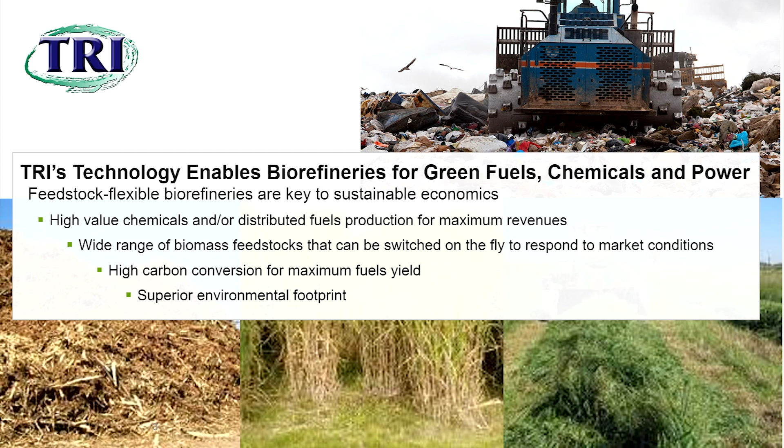MSW is obviously the most complex feedstock you can work with. It's highly heterogeneous, and the chemistry is pretty challenging. And of course, you've got to deal with a lot of contaminants. So at this point, we've got a lot of scars to prove it, but we have gone through a pilot plant and ran about 14,000 hours of different feedstocks. And actually, we went all the way from feedstock to finished product, jet fuel or spec diesel. So I think that has helped us to develop the technology.

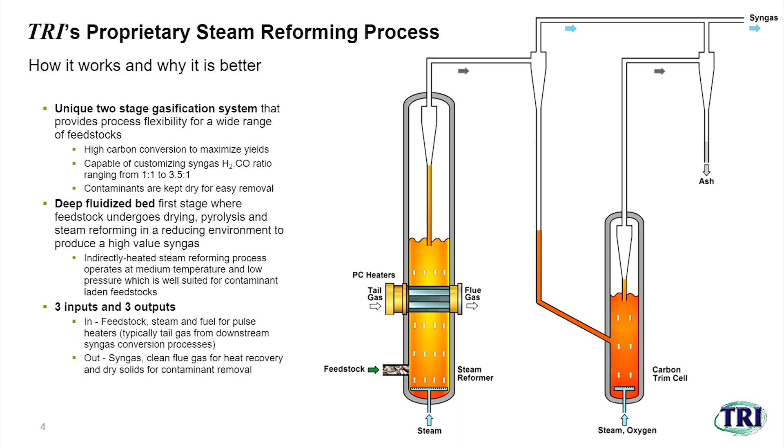And obviously, there are a lot of unit operations, and each part can be modeled separately. What we are doing initially is just this part. So we have a long way to go. We are in probably the second or third inning of this whole CPFD work, but we've got a lot of stuff to do, a lot of options to improve the process.

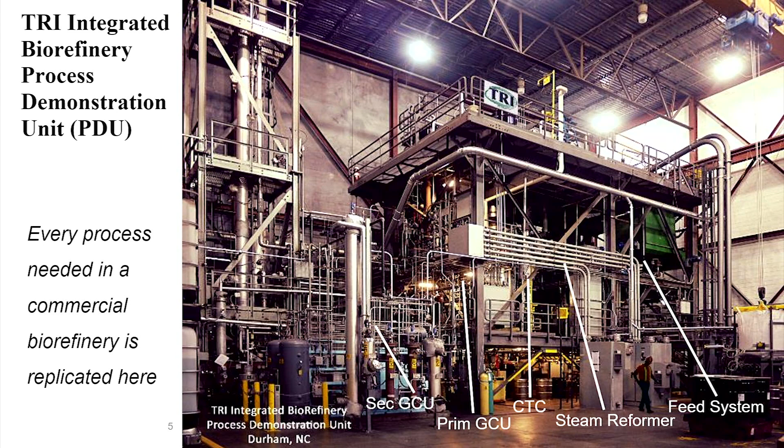And this is our pilot plant, our pride and joy. It's actually a 4-ton-a-day unit. You can see the feed system here, the steam reformer, the CTC, which is the second stage, then the primary gas cleanup unit, then the secondary gas cleanup, which also includes the compressor station, and then the FT unit. This is a standard conventional fixed bed Fischer-Tropsch unit, 3 tubes in there.

So what we do is essentially feed 4 tons a day of feedstock, take a slipstream of the gas, go through the gas cleanup train, compress it, and then run it into the FT, generate FT fuels, and then we go from there to the upgrading unit.

So every part of the commercial operation is represented in here. Originally, we started with just the gasification unit. We said, well, we generate gas, we qualitatively and quantitatively analyze the gas, and if it's clean enough to go into the downstream process, it should be good enough.

But then DOE came back and said, no, we want every part of the process to be represented, because commercially, only when you fully integrate the plant and run it, you get valid data and you can scale up reliably, which made sense, but to find money for that was a challenge. But anyway, finally we went through and got all the parts of the process and demonstrated that.

Now this is the same setup, except that we also have had the opportunity to work with Velocys, and this is the Velocys reactor right here. It's a microchannel reactor. Obviously this is the fixed bed tall unit versus pretty compact, very efficient, and so we worked with Velocys. We have run a biomass for their commercial demonstration unit and generated again FT liquids.

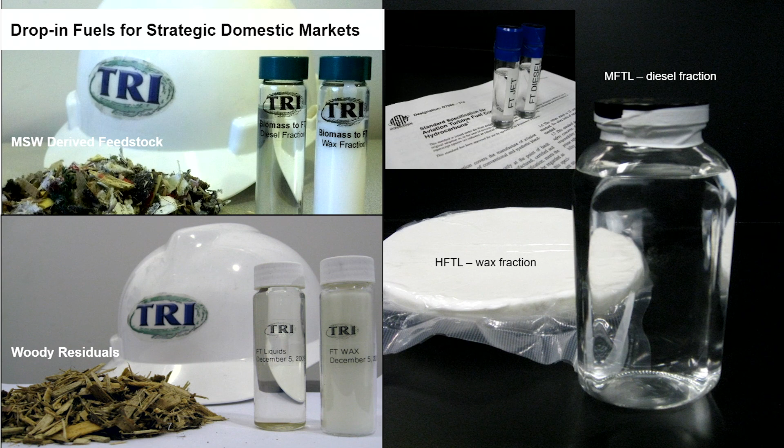And this kind of tells you what we have generated. We have done MSW, we have done woody biomass, some ag waste, and generated FT liquids in here. And then we also have generated jet fuel and spec diesel.

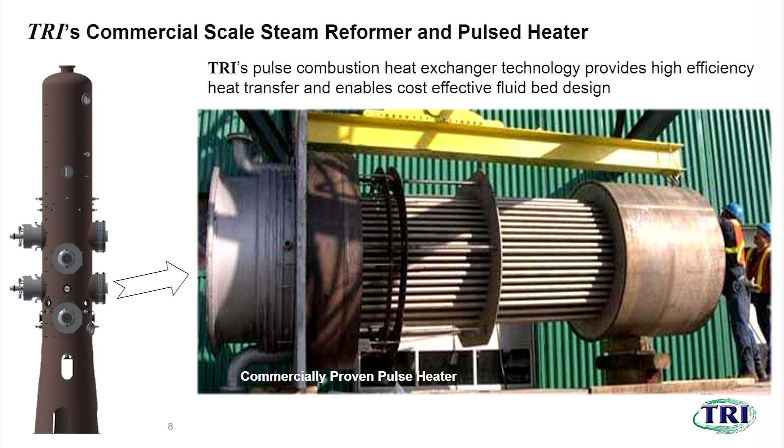This is our typical, what we call first generation heater. It's got essentially a plenum and a combustion chamber, and then it's got the tailpipes, what we call resonance tubes, and then the flue gas goes through that. And because we are operating in a pulsating mode, we essentially have a back and forth pulsating flow field, oscillating flow field inside the tubes, which enhances the heat transfer.

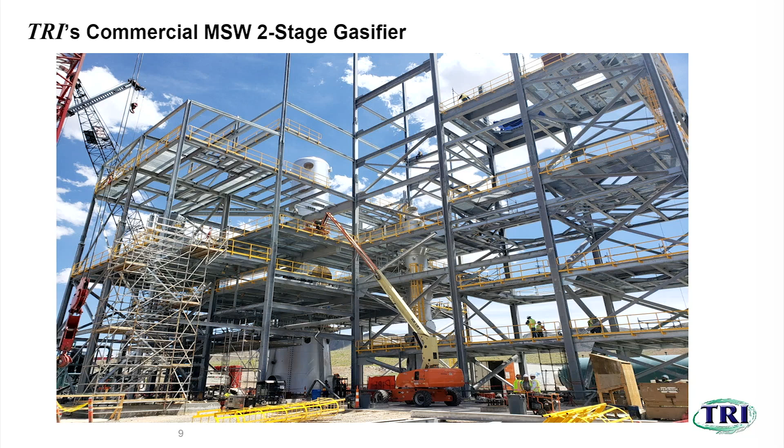So our goals in Barracuda simulations are basically, we start with proving the performance, what we observe, and then visualize the dynamics of what's going on and validate. At every stage of the way, we want to validate the test. So from small scale to large scale, we want to go through validation of every facet of the process.

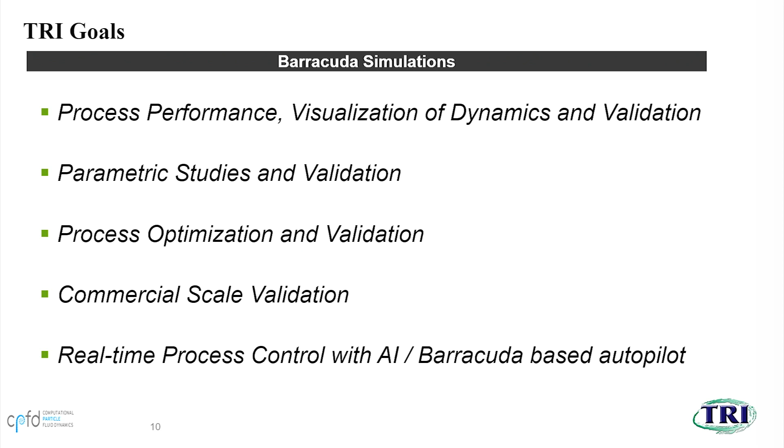We also want to do parametric studies and validation, process optimization validation, and commercial scale validation, and then ultimately what I see is that we want to do real-time process control. Of course, AI is advancing quite a bit. We are starting to work with some companies which have the AI software, and basically integrating Barracuda, Aspen, and AI to control the process.

So we actually have engineered bed material. We work with the bed material, run some cold flow studies and hot studies as well, and get parameters from that based on curve fit, and then use that in the model. And we also have done a tube bundle gridding study. I'll talk to you a little bit later about that.

We went through a thermal profile validation. Like Peter said, when they start, it's a cold flow model, then you put in thermal, and then you go into reaction kinetics. So that's what we did.

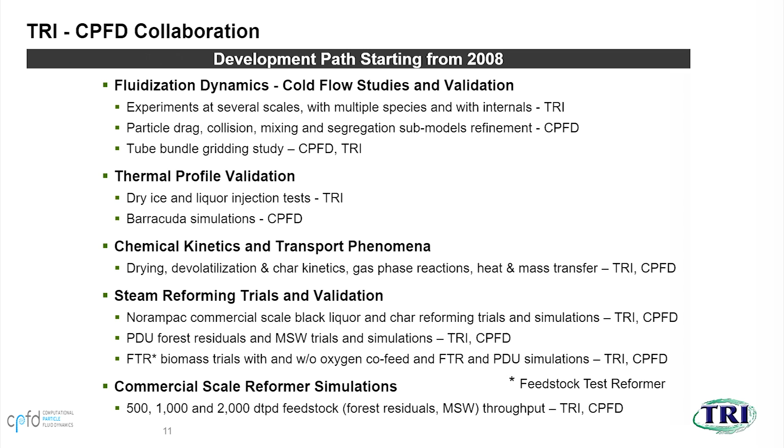And so we have done a comparison of that, and we have done what I call feedstock test reformer. It's a small unit, about 5 pounds an hour feed rate. We did the testing, then did the simulation, did the validation of the model, and then extended that to the PDU. We are modifying our PDU, and then we'll run tests and validate that again. And of course, we have done commercial scale reformer simulations.

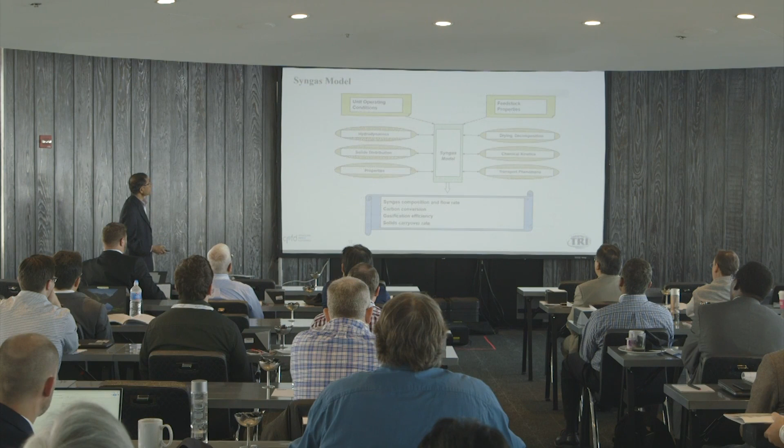Now, the idea of the model is you have two different features. One is the physics of fluidization, then you have the chemistry of the feedstock. So you have to marry the two in a model. And obviously, the physics of fluidization depends on a number of factors. We are dealing with unit operating conditions, the hydrodynamics, solids distribution, elutriation, entrainment, and obviously the basic properties of the bed material and the feedstock.

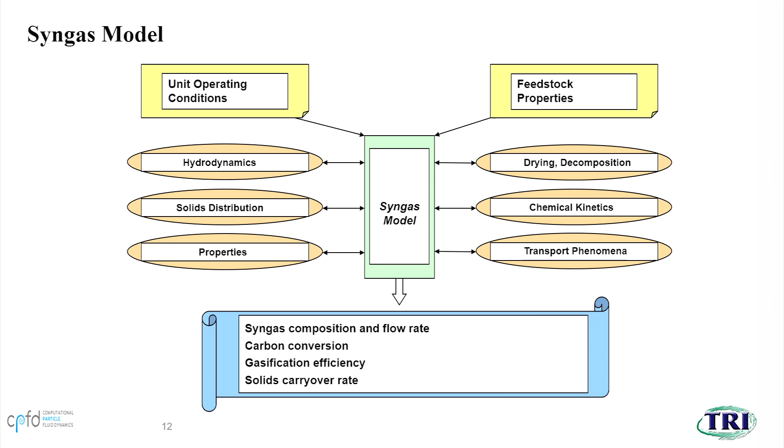The feedstock properties essentially are going to dictate the chemistry; the particle sizes are changing, and you have to make sure that you can account for the drying, decomposition, the chemical kinetics, both in the homogeneous and the heterogeneous phases. And then you have to look at the interface heat and mass transfer, and of course the heat transfer to the tubes because we have internals in here. And the ultimate objective is to predict the syngas composition, flow rate, carbon conversion, gasification efficiency, and solids carryover rate.

And this kind of shows you the cold flow studies we have done, just an example. The very first cold flow study we did was at PEMM Corp, and we worked with Dr. Fred Zenz. And of course, when you talk to him, any question you ask him, he says, okay, have you looked at page 85 of my book? So, it's pretty comprehensive. And so, we worked with him.

This is fairly large; we were at that time looking at a 1,000 ton a day reformer for woody biomass. And so this was about 25 foot wide, and it's more like a 2D bed. It's about 24 inches depth. And we had essentially 8 heater bundles in there for a commercial unit. So it's a pretty tall, about 35 foot tall bed. Overall height was about 50 foot. It had cyclones to return the bed material. So that's where we did the testing.

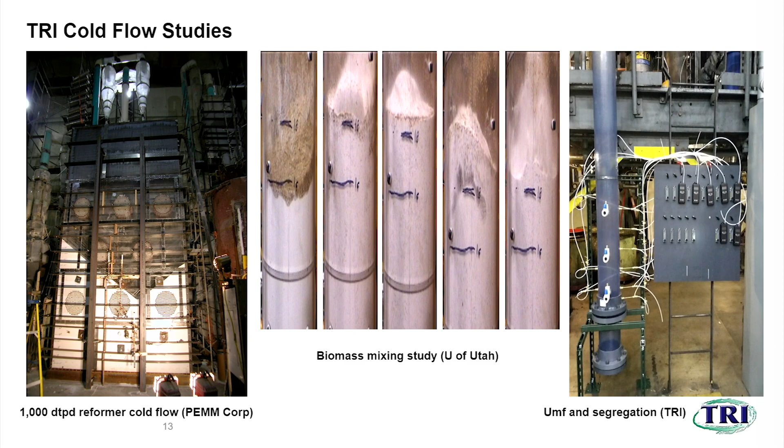Now this is, again, going back to 2008 when we started. The initial model was more or less using blockages, representing about 48 inch of cylinder for the actual heat transfer bundle. So the flow profile was quite different from what you would expect, obviously.

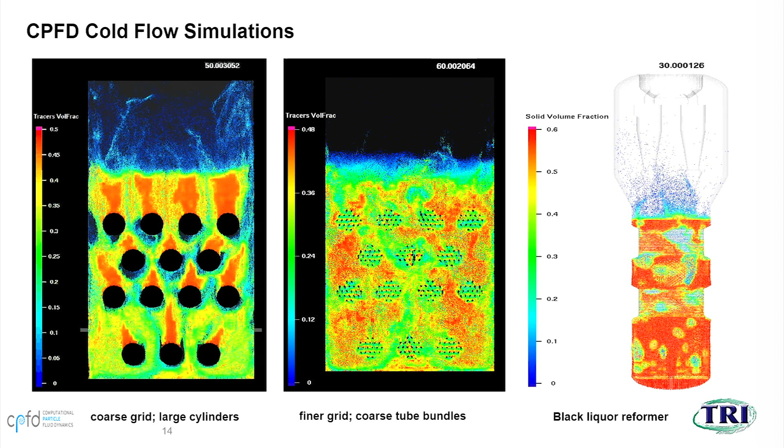Then we actually, this is the coarse grid. Obviously, at that time, the speed was definitely an issue. And this had about 20 tubes, larger diameter, 8-inch, still not representing the actual case, but it gave us a much better profile, better simulation of the actual cold flow unit. And we then did the actual model of the black liquor reformer.

And this was actually a tube bundle gridding study that I did with Peter. What happened was the actual tube bundle is about 253 tubes, 1.9-inch diameter, or OD. We represented it with more like a 61-tube bundle, about 4.4-inch diameter.

What I did was kind of use the single-phase analogy to figure out what kind of a pressure drop one can expect, and then we used that kind of approach to model that in CPFD and found that it does a pretty good job. We were able to get good, similar flow pattern, pressure drop, bed expansion, entrainment, solid circulation. The big news here is 10x faster than running with this. So at that time, it took a long time to do the simulation, so 10x is a big deal.

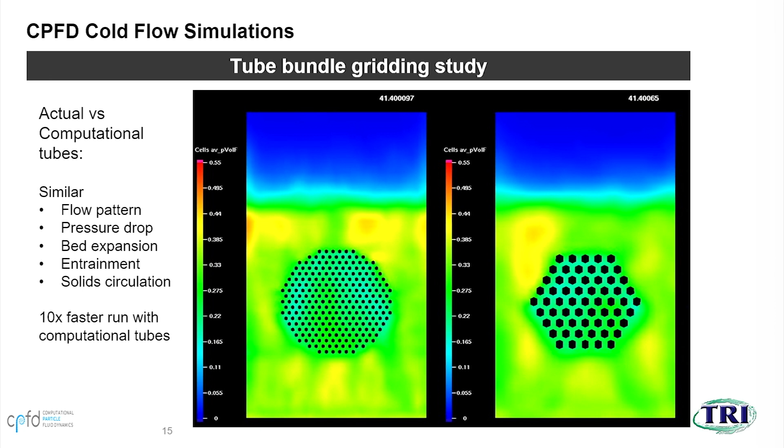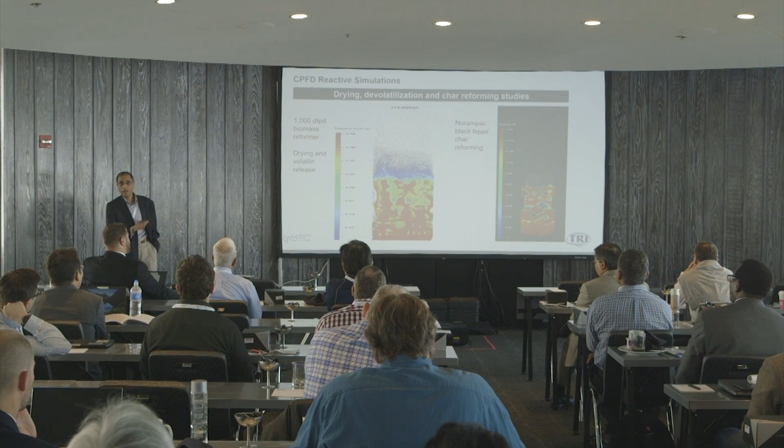This is, again, we were marching into drying, devolatilization, and char reforming studies. We went through a 1,000-ton-a-day unit, did the drying and volatile release, and again, the volatile release indicated that the particles were all migrating to the top. The collision model was changed, and then we did get better mixing. And we also did a char reforming study to make sure our heterogeneous kinetics is correct.

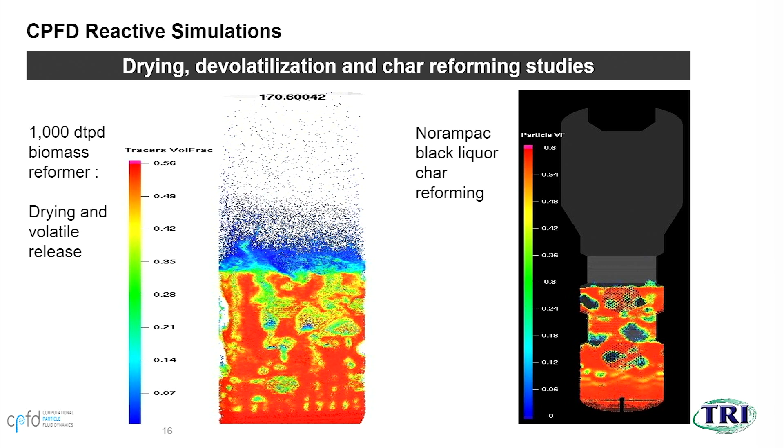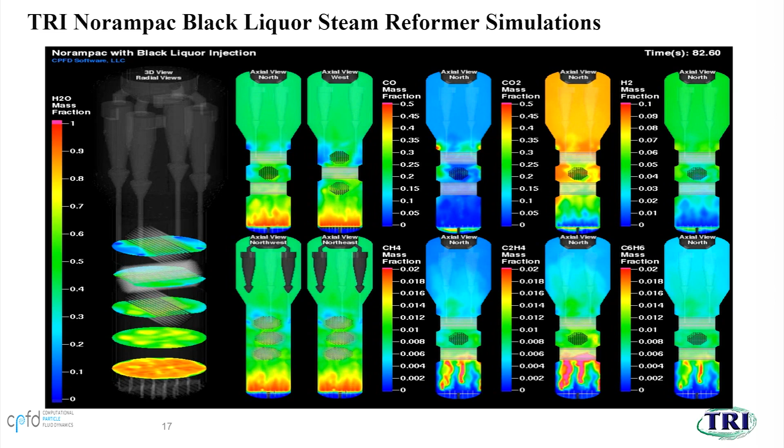And you can see that the CO concentration, CO2, and obviously hydrogen is increasing as we go up to the top. So qualitatively, like Raj said, what we're looking for is qualitative match. Quantitatively also, it did a pretty good job of matching what we expected. So we're pretty happy to see that we are able to predict what we observed in the commercial unit.

And this indicates our PDU work with the biomass or forest residuals. What we did take a look at was a thermal profile, and you can see that where the biomass enters, there is definitely a lower temperature. We actually did some cold flow studies where I used dry ice to represent what happens and put thermocouples to figure out what the temperature decreases in the local zone. So that gave us a good idea what happens, and the model predicts that even though a fluid bed is supposedly well mixed, you have temperature gradients within the bed.

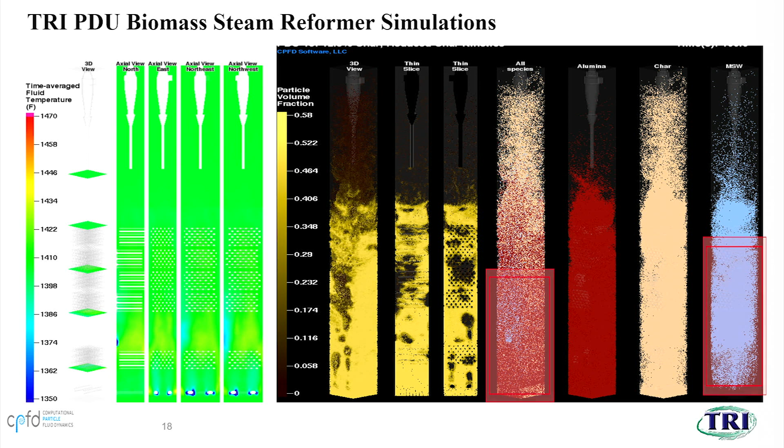And this one just shows the different species of particles, and you can see that the biomass is pretty well distributed. Obviously, there's a higher concentration of MSW or biomass in here, but then it does distribute. Obviously, the devolatilization time scale for these particles is a lot longer than the mixing time. So it's pretty well mixed by the time it releases a lot of the stuff.

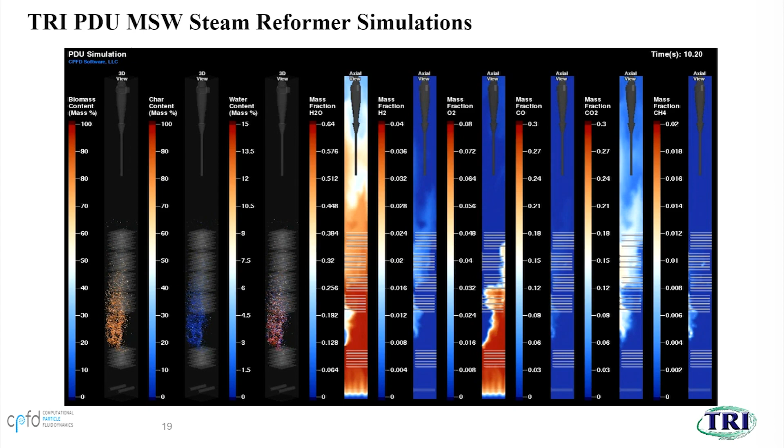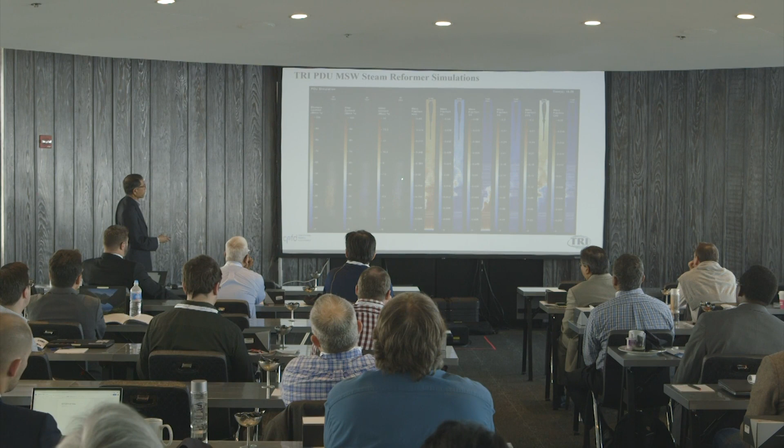This is, again, MSW PDU reformer simulation, the full kinetic model. And you can see that, again, we are looking at what happens with particles here. You're looking at biomass content, the char content, and then what you see here is the red indicates moisture being released, and then as the particle gets dry, you can see more blue stuff in here. So this indicates the concentrations of the different species. And again, we were able to validate the model with the actual data from the PDU.

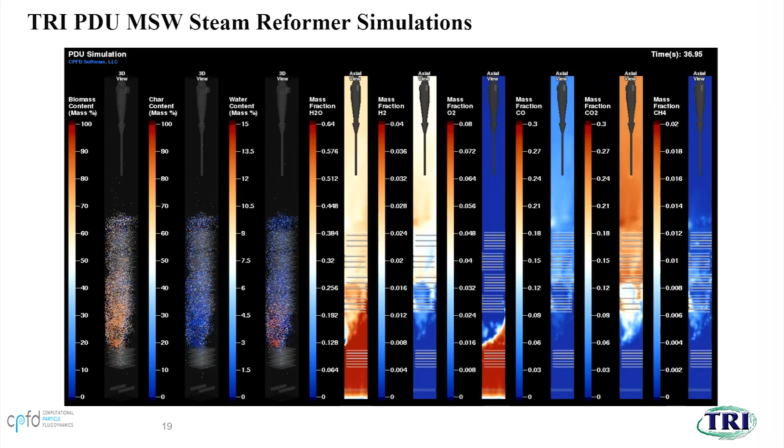I'll skip to the next one. This is a commercial reformer simulation. We did take a look at, again, this is projected numbers at this point. Once we start up our unit at Sierra, Reno, Nevada, we'll have a better idea of how this compares with actual numbers. And this indicates just the fluid dynamics.

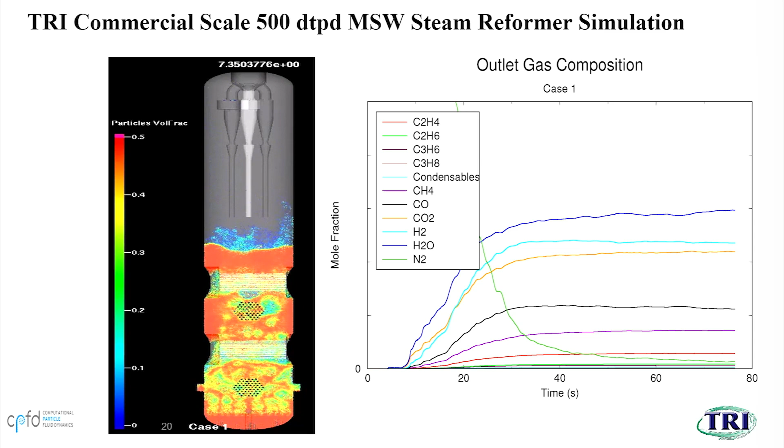You can see fairly big bubbles, obviously. Obviously, internals help limit the bubble size to some extent. And so this indicates the mixing, and on the right-hand side, the projections of our gas concentration.

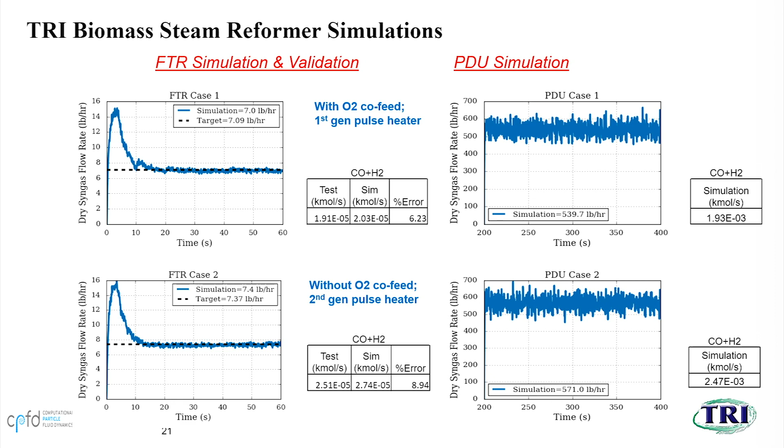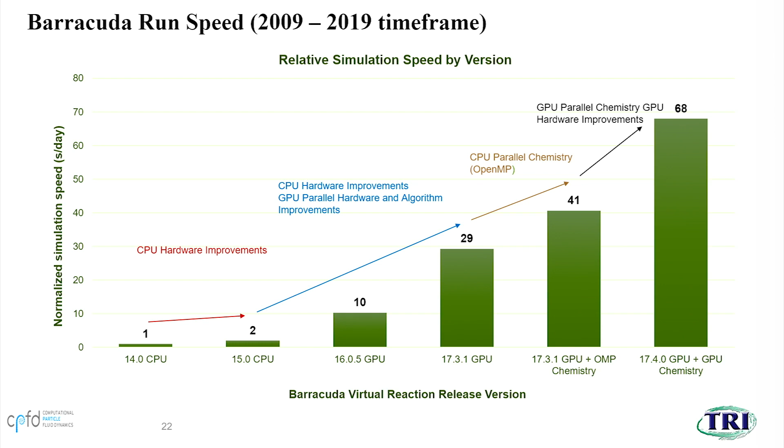Now this indicates the speed. You know, originally when we started, we were right here. It was very slow. With both hardware and software improvements, we've gone up by almost 2 orders of magnitude. So that's tremendous. And I guess NETL or Dirk is doing quite a bit of fascinating work in terms of cutting back on the time it takes to do simulations.

And so you might see another 10x or 100x even, over a period of time. So that'll be great, because we need all these improvements to do commercial simulations. Commercial simulations use millions of particles, and obviously it's a big unit, and to capture the essence of what the process does, we need faster.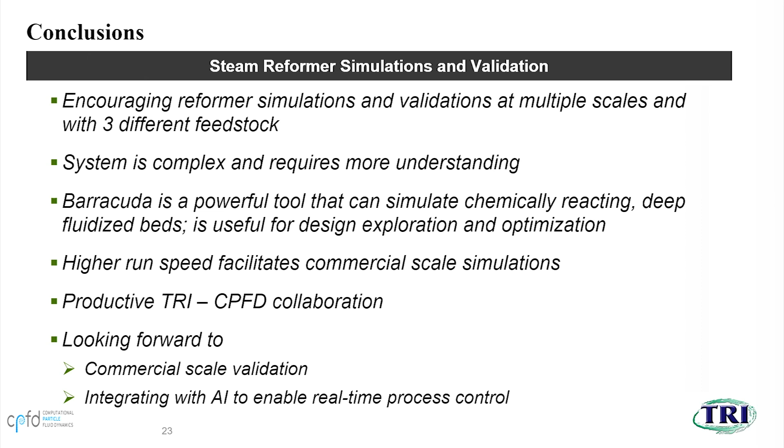So in summary, we have made a lot of improvements, we are learning a lot using Barracuda as a tool. It's very powerful. And like I said, we're in the second or third inning of where we can be. There's a lot of potential I see in using this as a tool to essentially do commercial scale validation and then integrating with AI to enable real-time process control. And it's been, like I said, a pleasure to work with CPFD.

All right, my burning question is, you're dealing with a lot of different types of feedstock to this system, it looks like. Yes. I'm coming from an FCC background where we know what the catalyst size distribution is going to the cyclone. So how do you set your transport disengaging height? What sets the elevation of your inlets to your cyclones? Does it change much with feed?

Well, the way we design it is a bed material that we want to keep below the TDH. And of course, biomass, obviously, what's coming through, we want to capture the large particles and recycle back to the bed, but the fines go into the second stage. So we are not really worried about what the feedstock is doing. We are only concerned about the primary material as the engineered bed material that we want to keep. So that makes it a little bit easier to design than trying to worry about feedstock.